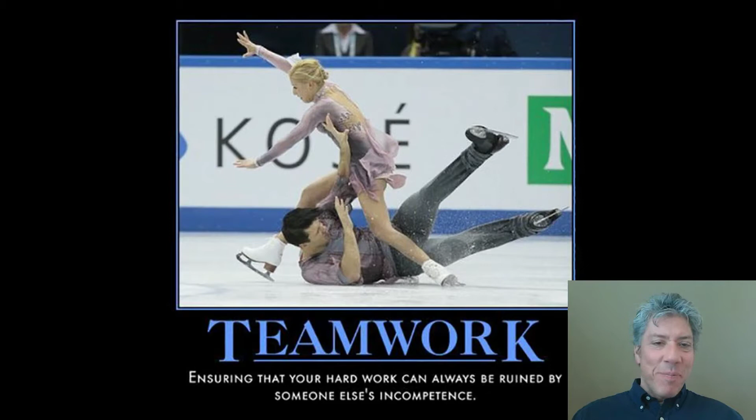We'll start our discussion with a demotivational poster about teamwork: ensuring that your hard work can always be ruined by someone else's incompetence. That one hits a little close to home sometimes, but it's funny.

So we're going to talk about shaft design. This is chapter 12, and to design a shaft there are several steps you have to take. The first thing is you have to know the rotational speed of the shaft. If you don't know that, you can't design the shaft, mainly because specifying the rotational speed helps you determine the life. There are tables in our book that tell us how long typical types of equipment and machines should be designed to last. A car should be designed to last, I think, 3,000 to 4,000 hours, something like that. Industrial machinery is about 20,000 hours.

You've probably not been out in the real world much, but I remember seeing a machine at Grody that had come back in from wherever they had sent it, maybe China, I don't recall, but it was a machine they had designed. I'm sure it has some shafts in it, but that's not the point of the story. Anyway, the machine came back, and if a machine can look tired, this thing looked tired and worn out. There was grease all over it, parts hanging at a weird angle, holes had been drilled and things added. I think the thing had something like 20 million cycles on it. Sometimes people get older and look tired, but this was a machine that looked tired. I've never seen such a thing.

But anyway, the rotational speed helps you figure out, if it's supposed to last so long and it's going to turn a certain speed, how many cycles is that? How long does this thing need to last? That comes into play when you're talking about the fatigue strength.

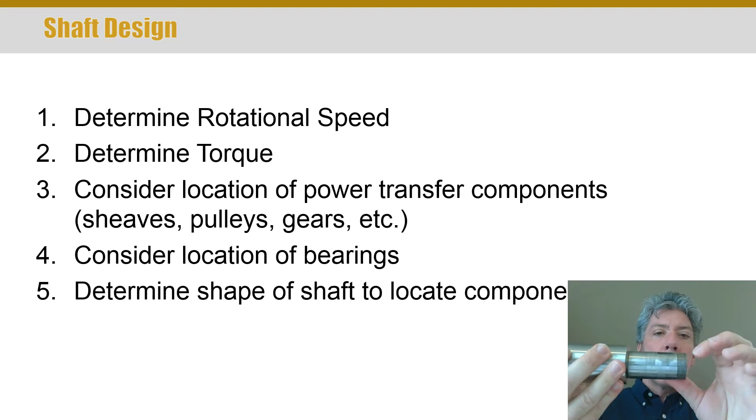You can see a Woodruff key here, and what's called a sled runner key here. You can see the end where it was held in the lathe as it was turned - there's a fairly rough surface here, about like the grooves in a vinyl record. This section's a lot smoother.

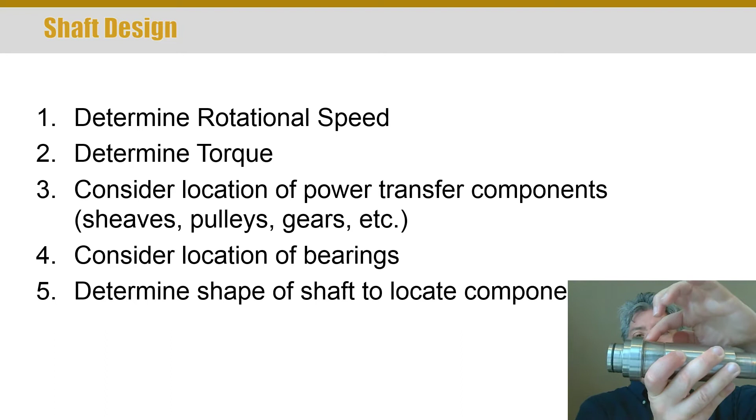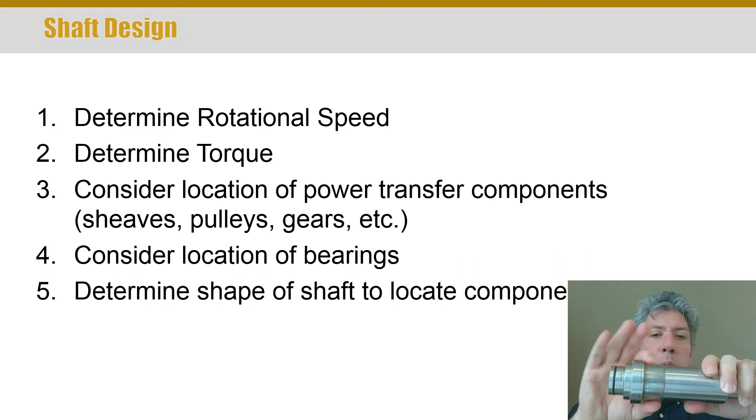This section's smoother, and there's another shoulder in the shaft there - it's busted off on the end, I'll show you that in a minute. It's also got a groove right here, and if you put calipers on this section, you'll find it's smaller than this section. The reason is if an element sits here, we want to slide it easily until we get here and then have a really nice fit. The finish here is smoother and the size is a little larger, just because we're trying to make it easy.

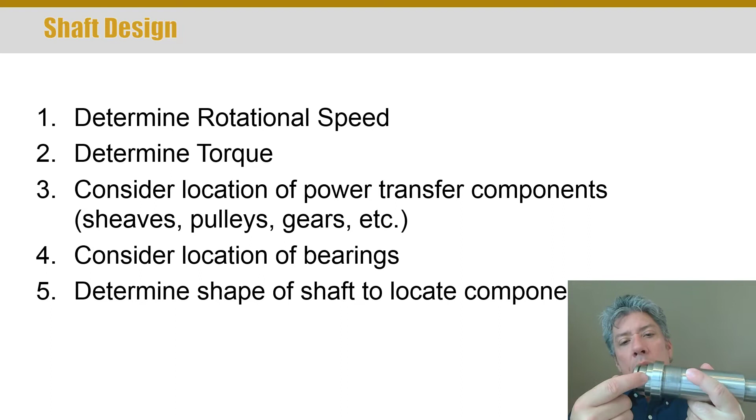Now this groove probably served - I don't know what this came off of. It was in the school when I started; I've held on to it because it's so useful. But at this point there's probably a place for a snap ring groove of some type so that whatever element goes here can't come off. You notice there's a pin drilled here, and there's an O-ring still in a groove here. So this is the kind of shaft we're talking about.

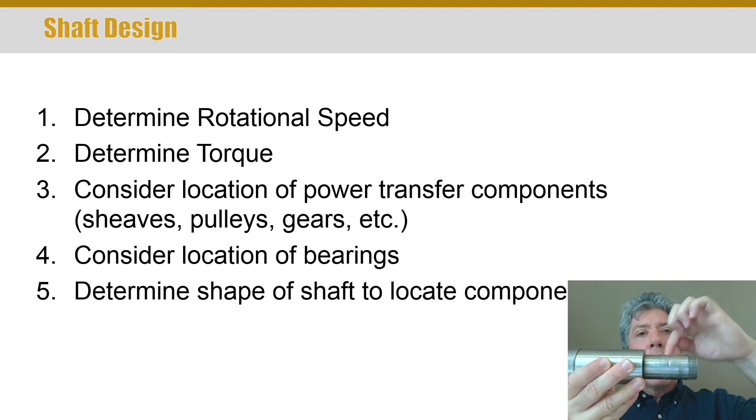You probably can't see it, but one of the tricks that's been used that I think is a bad idea—you want to try to avoid it—is in the shoulders. Right next to the shoulder, they've actually used the lathe and gone in, creating what's called an undercut. The reason it's undercut is because the diameter right here at the shoulder is actually less than the diameter on the bulk of the shaft.

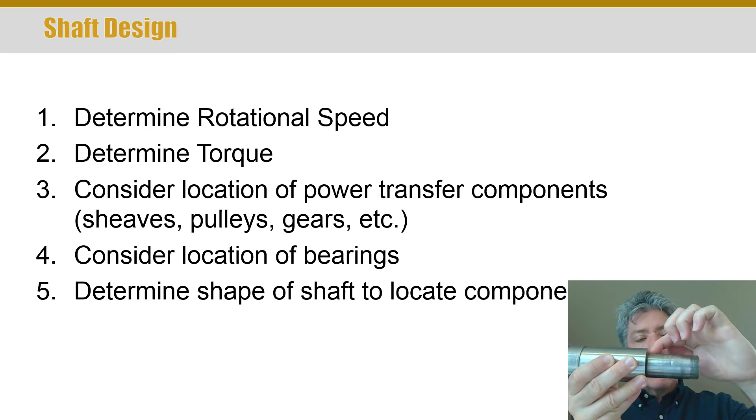Now, of course, this is already a point with stress concentration. Giving it less material, in my opinion, is a bad idea. There are ways to avoid that—maybe this designer couldn't, I don't know. But they similarly undercut near the shoulder here.

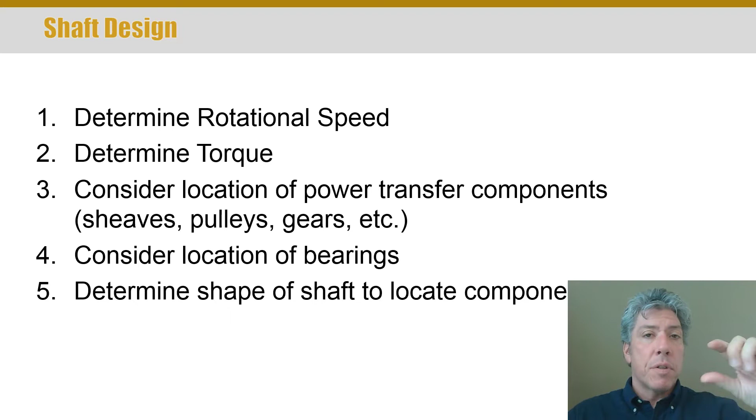Now, whatever this was used for, maybe it didn't really matter. Maybe the loads were so small and there were other reasons for making the shaft the size it is. It didn't matter—they could just undercut and make their lives easy. But most of the time, if you avoid that, you can have less material, in other words less diameter of the shaft. There are more steps.

Let's continue—calculate the torque, radial forces, and bearing reactions. Before, we said you need to know the torque—generally how much torque you're going to put into the shaft at one point. But torque can vary along the length of the shaft. If you think about several machine elements, like one main shaft that drives several pulleys, each pulley extracts some power, so the torque going to the next element will be reduced. We're talking about normal operation.

Obviously something can happen where a belt breaks and no power is flowing out of that particular section, so all the torque can go to the next pulley. These things are possible, but we're talking about normal operation when we design our shafts.

Now the radial forces and all of the bearing reactions are really important because those are our lateral or shear loads that cause moments in the shaft and can cause the shaft to fail. Those are the loads we have to design the shaft to carry.

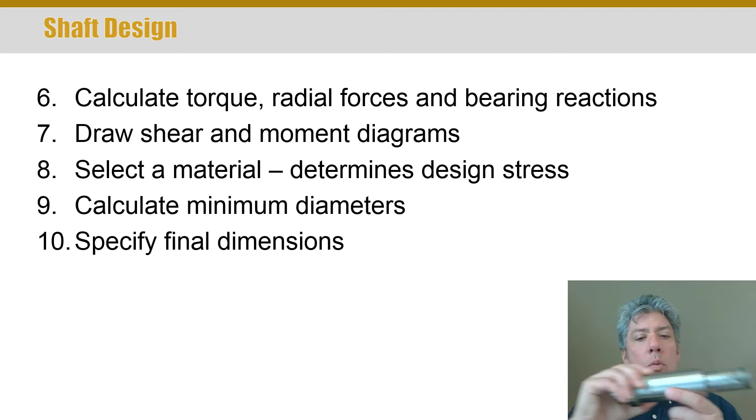So guess what—we get to draw shear and moment diagrams. If you remember strength of materials, you've probably drawn these. The thing is it's a little harder this time because in the shaft you're going to have both a horizontal plane to consider shear and moment in, but also a vertical plane, because all the loads—well, sometimes that doesn't happen. Sometimes the loads are all in one plane, and in that case you don't have to consider the horizontal plane.

But many times you have to consider both planes, so you end up with sort of a double beam—a beam in this direction and a beam in this direction. Now it's round, so the strength of the beam is the same in both orientations. But anyway, we end up making shear and moment diagrams, often in two planes rather than just a single one. What we really care about is the magnitude of the loads along the length of the shaft.

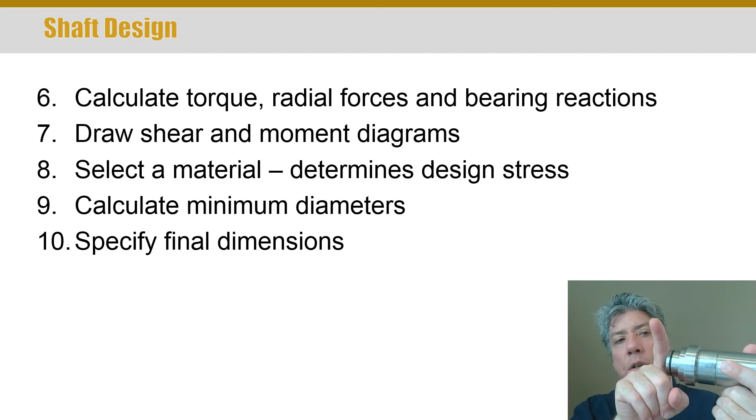So after you've got your vertical and horizontal planes, and you've calculated the reactions in those two planes and all the forces in those planes, as well as knowing the torque down the length of the shaft, you can draw your shear moment diagrams, locate points that have maximum moments, and take the square root of the sum of the squares. Basically, if I've got a moment in one direction and a moment in another direction at some point in the shaft, I have to take the vector sum—I don't care at what angle it ends up being, but I have to take the vector sum of those two moments to get the maximum magnitude of moment at that section of the shaft. You'll see more about this in the example problems I work for you.

Alright, step 8: select a material. This is the point where you've almost completely specified everything you need in order to calculate what the diameters have to be.

The way I help students understand this is: you might be able to make a shaft out of a material as soft as butter to do the job. The problem is it's going to be absolutely huge because butter has such low strength. But the stronger the material of the shaft, the lower diameters that will be required in general.

Now, that's not quite all. You also have to determine—are you going to have this machine used basically as it's cast? Will you do some machining on it? Is it machined out?

Exactly how is it made? Because that in part determines how long that material will last and resist fatigue - in other words, its endurance strength. So there are some other things to consider. But once we've gone all the way through step 8 legitimately, then step 9, we can calculate minimum diameters.

The minimum diameters we calculate, there's actually two equations we have to use. I'll show you those in a moment. And then finally specifying the final dimensions.

Now why wouldn't the numbers we calculate in step 9 be good enough? Well, we want to use preferred sizes. So if you calculate a required diameter based on strength and the load and so forth, how likely is it you're going to get 2.000 inches? It's not going to happen, right? You're going to get some odd 1.893 or something. We'll just round it up to a preferred size and you're good to go.

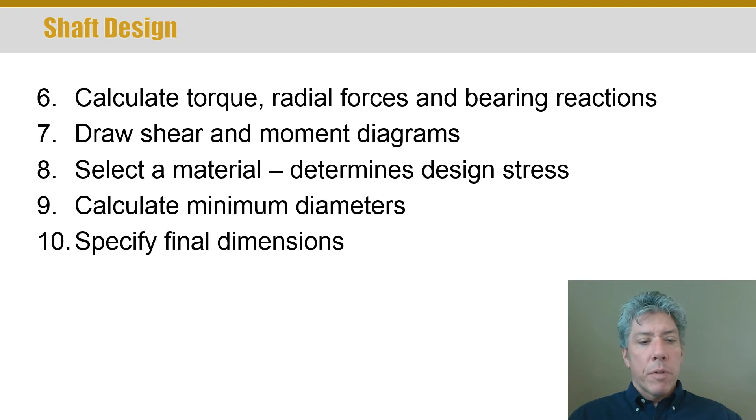So what factors affect shaft design? Let's consider that now. There's a lot of things to look out for. If you have a long cantilever - imagine this shaft, I'm guessing there may have been a bearing here, so this portion of the shaft would have been cantilevered out. And if this portion holds some type of machine element that has to transfer power, which it looks like it did because we've got two different keys here, whatever element was here twisting the shaft, well that was a section that was cantilevered. What we'll see later is anytime you have a gear, a belt, a pulley, anything like that, you end up applying bending forces to the shaft.

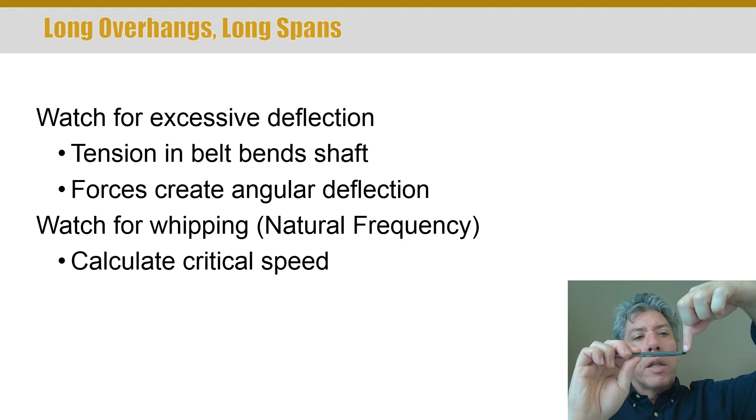A belt is a classic example - let's just imagine that we had a pulley out on the end of the shaft and we put a V-belt on it, tension it up real good and run it. I'm going to use a lighter illustration for that shaft since that thing's heavy. So pretend this is my shaft for a moment. Here's our load, our lateral load out on the end, and our last bearing is, say, here. What that will tend to do is bend the shaft.

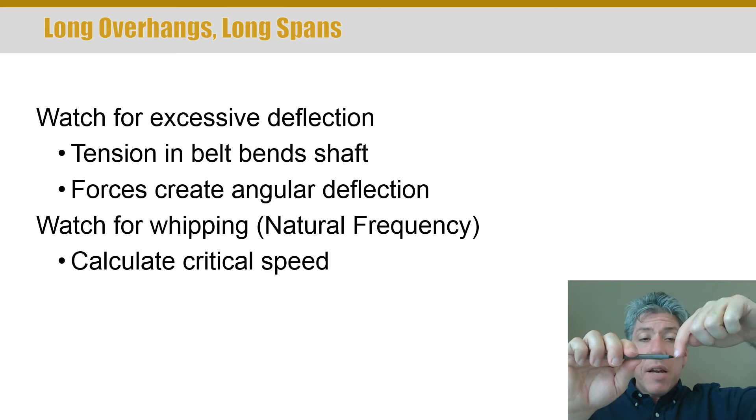Now, as the shaft rotates, the load stays in the same direction. So from the shaft's perspective, it's as if the load is rotating around, and essentially what's happening is we're doing this to it - hopefully you can see the pen deflect. And so that is a fatigue type load, something called fully reversed bending stress, because one particular element sees tension and then compression alternately, and of course it's varying in a sinusoidal shape.

Now, if there's too much tension in the belt, what can happen is the belt will fatigue the shaft and break the shaft. So you have to watch out for that and make sure the belt will not be over-tensioned and cause trouble. Another thing that can happen is something called whipping.

If the shaft is rotated at its natural frequency, or at its critical speed as it's also called, what can happen is that anything that's offset - if you imagine this shaft, you build it out of the best material you can, but is the center of mass going to be right dead on the center of rotation, or will all the elements be perfectly balanced where the center of gravity is exactly on the center of the shaft?

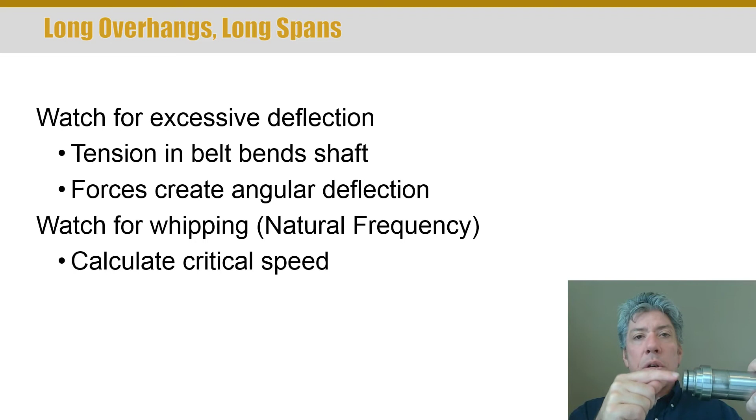No, of course not. So there's some distance from the rotation center to the center of mass. Now, as the shaft rotates around, that's like whipping a weight around, and what happens is that the shaft can hit its natural frequency, where every rotation causes the shaft to go farther and farther.

It has to do with the stiffness of the material, and the geometrical stiffness, which is due to the geometry, the size of it. But basically you need to calculate the critical speed. Now, it's not really easy to calculate it. A better thing to do is to measure the critical speed, essentially the vibration frequency, which can be done by other techniques I won't describe here.

One is a fairly simple technique: you listen to it ring, basically. You excite it and listen to it ring. But all that aside, if you can calculate the critical speed, you should. And really the calculation is not all that useful, as much as it is useful to know what you do to change the critical speed.

One thing you can do, if you add mass to the rotating assembly, what will happen is the critical speed will drop. Now, that may sound like a bad idea, but think about it. If your target speed is, let's say, 1,000 RPM, and you've got a critical speed at 1,000 RPM, but you add more mass, that moves the critical speed, let's say, down to 800 RPM. Well, as long as you accelerate through that 800 RPM quickly, you're not at the critical speed anymore. You can get on the other side. You can leapfrog the critical speed.

Of course, one solution, rather than adding more mass, is to increase the stiffness of the shaft. So one way to do that is to increase the diameters. Now, that also adds mass to the shaft, but typically the diameter will, despite the mass you add, increase the strength much more than the mass added, and so it increases the stiffness much more. And so that typically will move the natural frequency up, and as long as you never get up to the natural frequency, then you don't have any concern for the shaft failing due to that phenomenon.

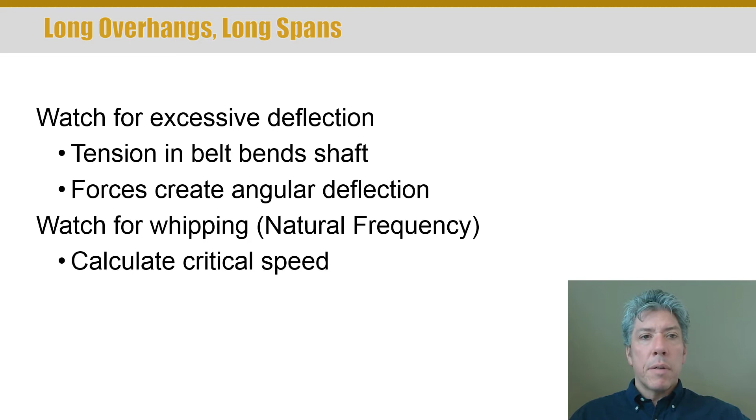Now, shafts commonly less than 3 inches are just made out of cold rolled steel. You can get what's called shafting, which is high precision shafting. There's several different grades. You can get it more or less precise. Typically, if you get a shaft that has very few features that need to be cut on it because it's close to the nominal size, typically what will happen is you'll just buy it about 1/1000th of an inch undersize. So if it's a 1 inch shaft, it's going to come in at 0.999, or maybe 2/1000ths undersized, 0.998. That's really common, and shafting is a special type.

If you use cold rolled steel, cold rolled can't be just applied directly as shafting. It's not perfect enough. It's not round enough. It really does have to be turned. But shafting that is already made, if you cut a key in it or you cut features in it, a lot of times you have to straighten it back out, because when the shaft is made and it's precise, what will happen is it has remaining residual stress in the surface material, and when you cut features in it, it deflects enough that it has to be straightened. And that's a whole art to itself.

You can imagine that many shafts aren't worth straightening, but shafts from things like large ships are commonly straightened in order to improve their performance and get the center of mass closer to the center of rotation, often is the goal. And of course reduce stress on bearings and things like that.

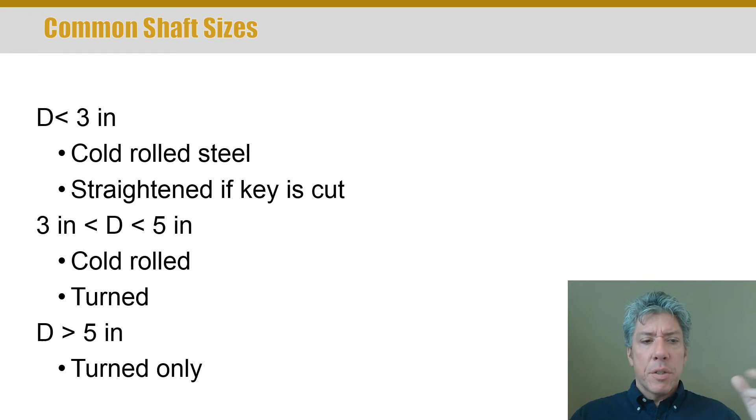Between 3 and 5 inches you can use cold rolled, you can use something that is just turned, but greater than 5 inches are typically only turned. In other words, put on a lathe and machined in order to create the shaft. So all large shafts for things like large ships, any cruise ship shaft, etc., is going to be turned. I mean, I suppose it could be forged, but you need features on it that are precise, so at least sections of it are going to be turned.

What materials do we make shafts out of? Well, we're going to approach this from the ductile material approach, and basically use what's called the maximum normal stress theory of failure. If you need a very complicated shaft, like a crankshaft that's going to be made out of cast material, then again you need something different than what we're showing here. This is just for shafts that look generally like this thing, okay? Things that are common machine shafts that are custom.

Most shafts are made of steel, which we will consider, and so they'll have similar elastic moduli. In other words, their material stiffness property will be pretty much the same regardless of what alloy you choose. You can choose some super strong alloy, and yet its stiffness won't be any different, it just is stronger. Or even a weak 1020 steel will still have about the same material stiffness.

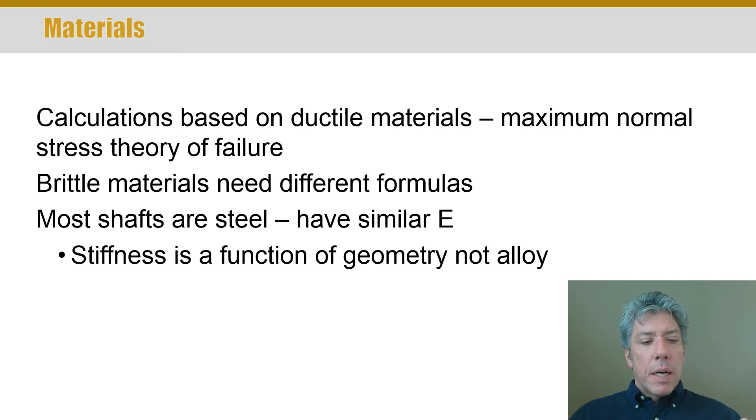It just can't take as much load as something that's stronger. So the stiffness of the shaft will be a function of geometry primarily, and not the alloy. It is true that each steel alloy has slightly different elastic moduli, but not enough difference to warrant changing material just to get stiffness. You really have to change the diameter to get stiffness out of the shaft.

So here's a typical shaft. You can see a gear mounted all the way on the left, there's a bearing at B, another gear at C, and finally another bearing at D. Now you notice gear A is cantilevered out off of the bearing B, and so that section of the shaft is going to experience potentially much higher bending loads, whereas the gear at C is straddle mounted, so the effective moment in it, in the middle of the shaft, will be lower.

Here's what I mean by you have to design it. You have to decide how far apart each of these elements will be, where they'll be located. Are you going to cantilever, or are you going to straddle mount everything? What kind of features are necessary in the shaft? Do you need shoulders? You see at least four shoulders, one shoulder for each element, so that that element can be located precisely.

Now, you notice there are no retaining ring grooves for the bearing, but there are for both gear A and gear C. Why is that? Well, commonly the bearings are held in place by a housing, so the housing has features that prevent them from moving. Now one problem: if you put a shoulder on the opposite side in the housing on one bearing and also on the other bearing, as the shaft heats up and the case has a sort of delay in heating up, the shaft can end up generating very high stresses.

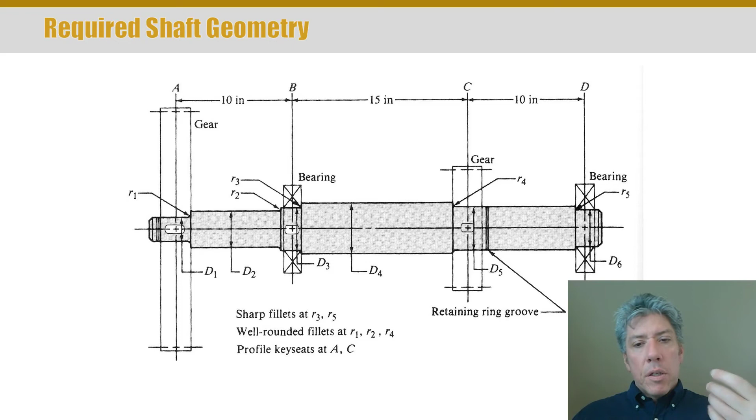It's convenient to have the shoulders to locate the gears. It's nice to be able to reduce the mass of the shaft by tapering it along the ends, because then machine elements can be put on and assembled easier. So there's many reasons to turn the shaft and have different diameters along its length. Don't be a lazy designer and just try to get one diameter and be done with it.

Now, the power in the shaft, the power that the shaft transmits, and the torque are closely related to one another. You'll see the power-torque-speed equation appear over and over. Technically from physics, power is simply torque times speed.

But it is convenient to have power in horsepower, torque in inch-pounds, and speed in revolutions per minute. If that's the case, you don't want to figure out the conversion factor every time, so you'll see me write this equation and use it over and over: power equals torque times speed divided by 63,025.

Some people just use 63,000. A more accurate conversion factor is 63,025. This allows us to put power in horsepower, torque in inch-pounds, and speed in RPM, with the units consistent by that conversion factor of roughly 63,000.

Now, sometimes you want to use torque in foot-pounds, for example. Page 695 has a whole nice table of conversion factors in both metric and English units. I highly recommend you bookmark that page now, because you'll see the conversion factor of 63,025, but also the conversion factor of about 5,000 some odd when you want torque in foot-pounds instead.

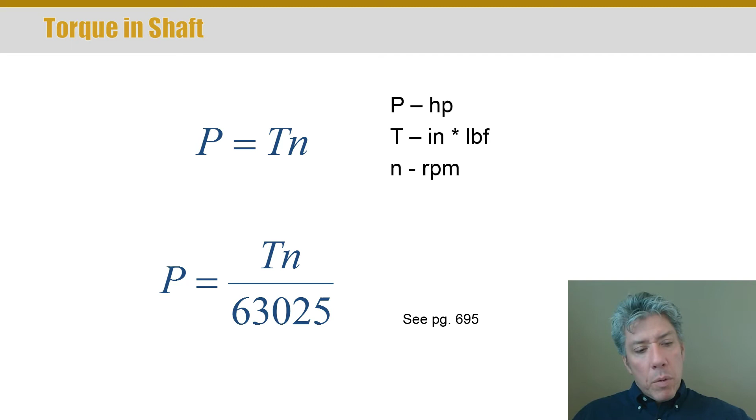This is an equation worth memorizing. If you don't want to memorize it, that's fine. By the end of the class, you probably will have it memorized, though.

So what are the effects of the machine elements on the shaft? Well, gears end up, it turns out, because of the involute profile, which we'll learn about later, pushing each other out of mesh. There's a radial force generated because of the shape of the tooth that pushes them apart.

Also, the whole purpose of the gear is to transmit torque, so there's essentially force trying to turn the gear teeth. That force is a tangential load—it's the whole point of having the gear in the first place.

Now, obviously, the tangential load, W sub t, is related to the torque, but it turns out that because of the shape of the teeth, the radial load is also related to the tangential load. So there are equal and opposite loads on the gears.

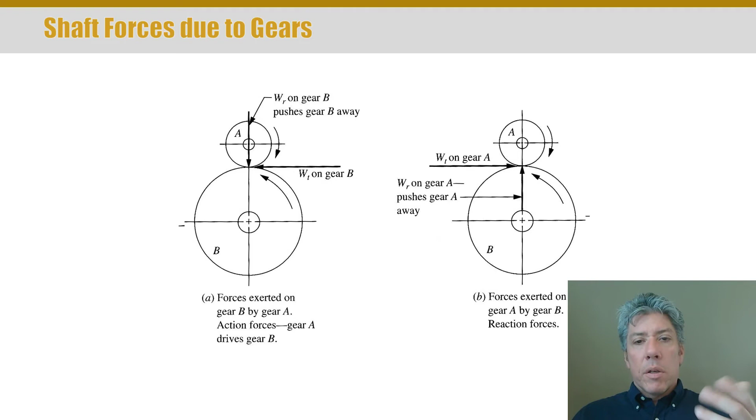For example, if there's a radial load and tangential load on gear B, the larger gear, then there are equal and opposite loads on gear A. Depending on which shaft we're designing—the one A rides on or the one B rides on—we need the loads in the correct direction, so you really have to think about the proper direction for all of these loads.

The pressure angle is given the symbol phi, and the tangential load and radial load are related to one another by that pressure angle. In fact, the radial load is the tangential load times the tangent of that angle.

Commonly it's going to be 20 degrees because gears come in standard pressure angles—well, you could make anything you want, but standard ones are 20 degrees. 14.5 degrees is an obsolete standard. There's 20 and 25, I believe, that are standard for spur gear teeth, and other angles for some other gearing.

And of course, D is the pitch diameter, not the diameter of the shaft, but the diameter of the machine element, the gear in this case.

Notice that the radial load is written in terms of the tangential load. The reason is because the tangential load is really the whole point in having the gear. That's what causes the gear to turn and transmit torque. The normal load is just included for completeness—we typically won't even care about it, at least not right now, not till we get to gears.

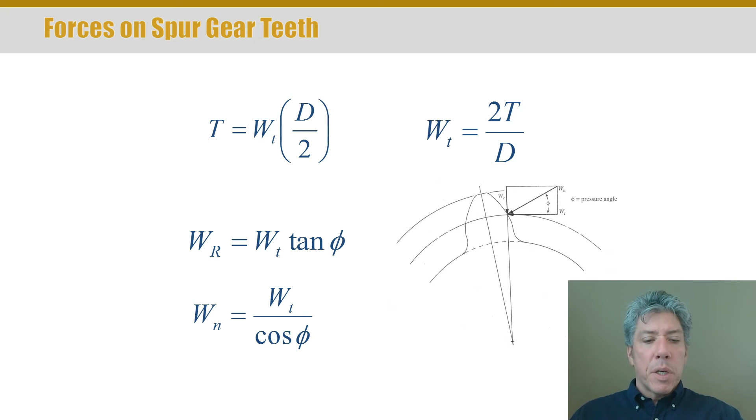It's something you typically calculate from torque, obviously. You know how much torque, and because you know how much power has to be transmitted, you end up backing out the tangential load first.

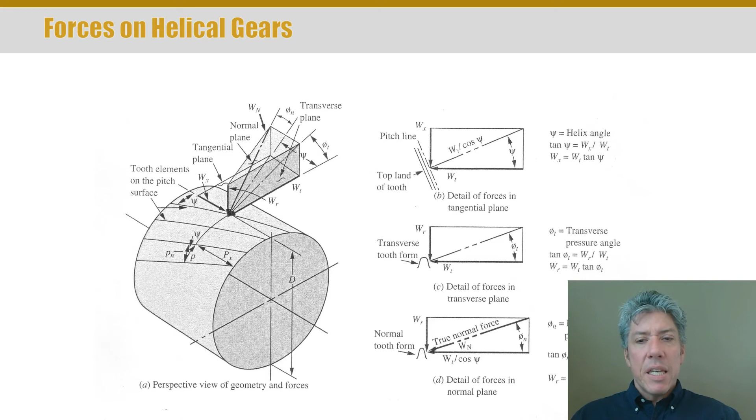Now in helical gearing there is a difference between the transverse pressure angle and the normal pressure angle, but don't worry, I'll make it clear which one I'm giving you, and I'll make sure it's easy for you to deal with if I ever give you helical gear teeth.

So I've already talked through all of this. Again, W sub n is the true normal force—it's the force that's actually applied to the gear teeth. Gear teeth are always lubricated; you should always put oil between them, at least for decent design.

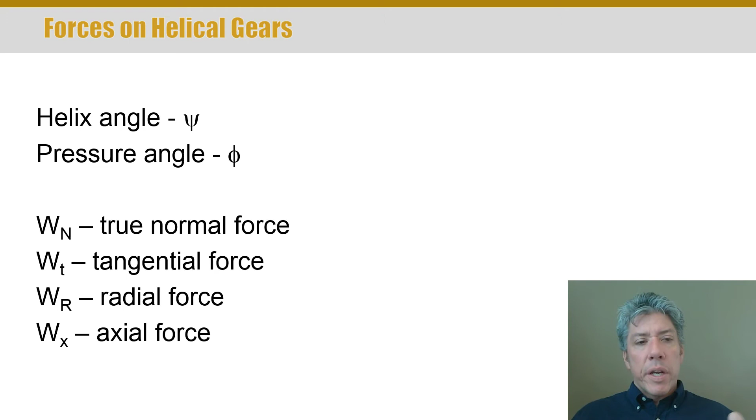I'm sure there are some machines that don't have it, and some gear materials are self-lubricating, some plastics, etc. But the point is that they can slip—they do slide on one another. So the oil basically makes the force along the tangent of the surface zero no matter what direction you're looking at. So the only load that can really exist is the true normal force, but that normal force breaks down into the tangential, radial, and axial components as you saw on the previous slide.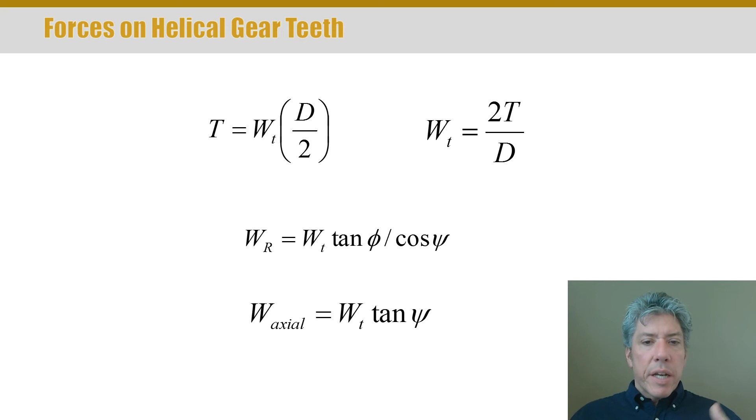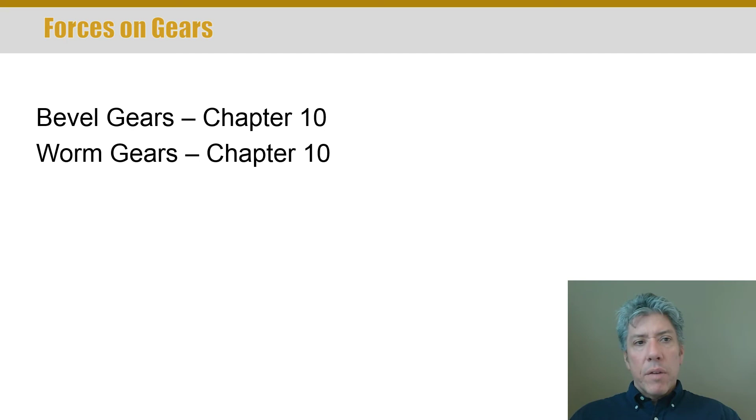There are some more complications that come from bevel gears and worm gears. We'll look at those in Chapter 10. For now, I just won't give you this type of gearing when you're trying to design a shaft, so don't worry about it right now.

What about chains? We haven't learned much about chains yet, but for chains there's always a tight side and a slack side. Think of your bicycle—when you pedal, it's the upper chain that's in tension, pulling the rear sprocket on your rear wheel. The lower side is slack.

That's the whole reason that on a multi-speed bike you have to have what's called a derailleur. It's basically a spring-loaded set of sprockets that take up the extra slack in the chain. They're slack because you have to accommodate all the different gear ratios—you need a longer or shorter chain depending on the sprocket ratio.

So typically we neglect any force on the slack side. You typically don't want to install a chain where there's preload. You want some kind of tensioner, but not one that gives significant force on the slack side most of the time. So we'll neglect that, and the force in the chain can be calculated.

You see the equation there based on the diameter of the sprocket and the torque. It's a simple equation—basically a moment equation, force times radius equals torque. But we'll neglect any force in the slack side of the chain, whichever that happens to be.

And we're going to neglect something else. Since usually the angle of the force Fc, the force in the chain, is close to the direction between the centerlines of the sprockets, we'll typically neglect that little angle phi. We'll just say the force acting on the chain acts directly between the centers of the sprockets.

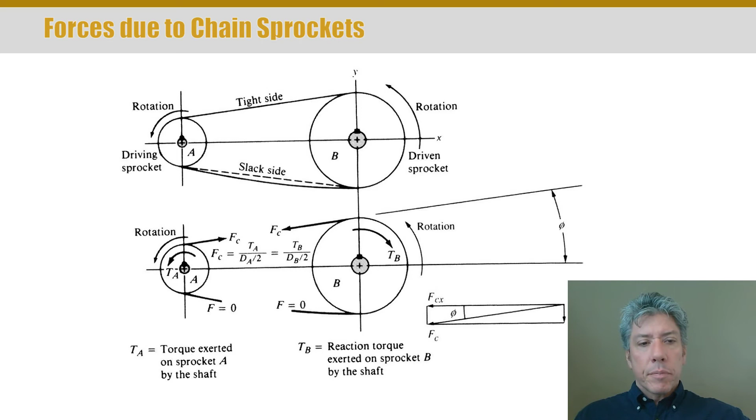Now belts, on the other hand, cause force on shafts as well. As a matter of fact, in a belt—say a V-belt—you have to tension it where there is pre-tension in the belt. So both sides, the tight side and slack side, have significant force in them, and we'll call that F1 and F2. Of course, the force in the tight side is larger because that's technically the driving side.

What we're going to do is basically assume that the bending force on the shaft is just the sum of those two forces, F1 and F2.

Now the magnitude of F1 and F2, and the relationship between the two, depends on how tight the preload is made. Whenever you put a belt on, you have to give it some initial tension before operation. During operation, one side becomes even tighter and the other becomes even looser—thus the name tight side and slack side. If you don't give enough pre-tension, the slack side can whip around a lot, and that's very problematic.

Depending on what the pre-tension is, that will change the relationship between F1 and F2, and it'll increase the total bending force. The tighter the initial tension in the belt is, the more bending force there's going to be on the shaft.

So how do you accommodate that so you can do calculations if there's a pulley on the shaft? We assume the belt is properly tensioned, and reasonable proper tensioning is where the tight side has about 5 times the force of the slack side. That's a rule of thumb—it's good tensioning for good service life of the belt and good operation.

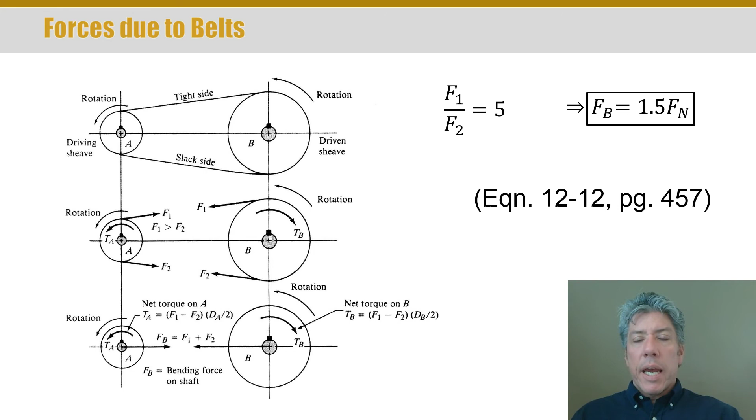Now, it's not obvious, but if you take that relationship between F1 and F2, you can come up with the total force in the belt. Here's the equation you need—it's equation 12-12, on page 457. I'd suggest you go look at the details of how it's derived. You'll see me use it in example problems. This is a page that deserves a tab, and equation 12-12 certainly deserves a highlight.

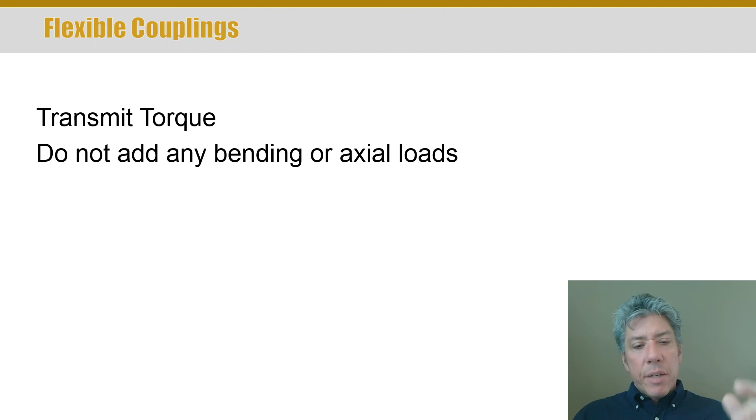Now, couplings are things that couple shafts together, typically axially. These typically do not have any side loading, so they transmit torque only and don't add any bending or axial loads to a shaft.

Now, since keys are features with relatively small sizes that introduce stress concentration, we need stress concentration factors. There's a lot more to this than what you'll see here, because the inside corner of the key seat can be cut with many different potential radii—you don't have a zero radius in those corners. Depending on how close the key has to fit, and how the corners are broken or not, the stress concentration the key provides will depend on that inside radius to a large extent.

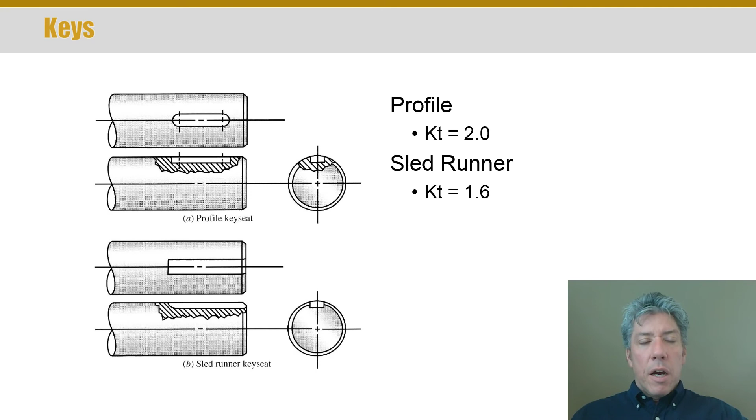We're going to simplify all that since it's not our focus in this class. We'll assume that all profile key seats, shown at the top, have a stress concentration factor of 2, and all sled runner key seats have a stress concentration factor of 1.6. These are reasonable starting points, but anytime you're designing a shaft, you should look up a table giving the stress concentration factor as a function of that inside corner radius, because it does make a difference.

It's the same story for shoulders in shafts. Shoulders can either be sharp or well-rounded. Again, there's a lot more to this, and if you've gone through Strength of Materials with me, you know we had a whole appendix devoted to calculating stress concentration factors based on the radius, the smaller and larger diameter, and so forth. That's not our focus in this class.

So for sharp corners, we're going to take the stress concentration factor to be 2.5, and for well-rounded corners, we're going to take it to be 1.5. So while there's a lot more to this, we're just going to take a sharp shoulder to be something we're going to shove a machine element up against.

A well-rounded shoulder is something where we just want to transition in size. So the picture here shows a mating element coming up against the shoulder with a well-rounded shoulder, but most of the time we're just going to assume that well-rounded shoulders are not those shoulders where we're going to mate a machine element against.

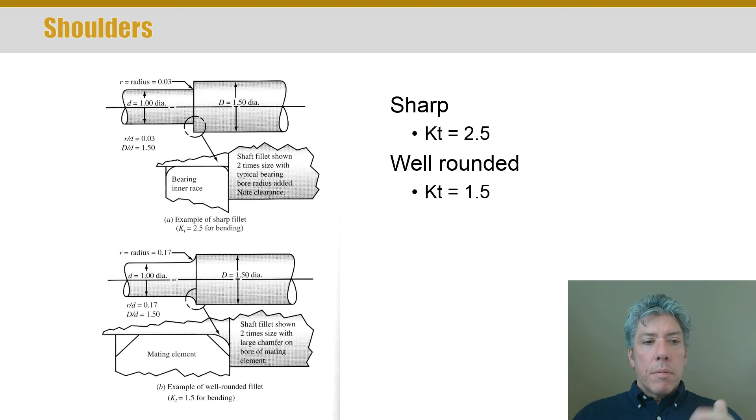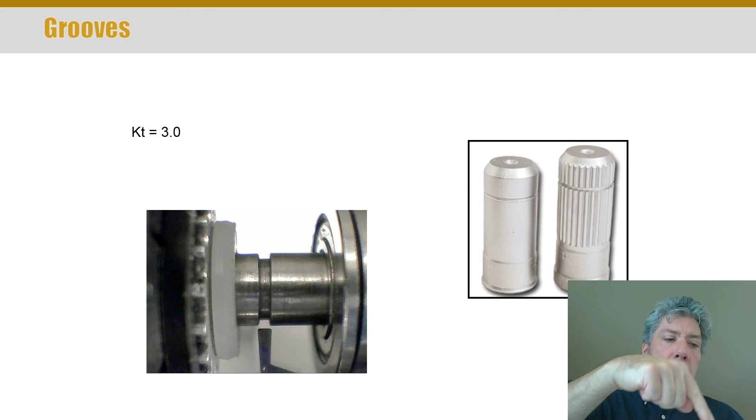The stress concentration factors are a field of their own, and you can look them up in references. But you'll notice that we've got a snap ring groove here, and an oil ring groove here. Any groove like that in the shaft typically will have a fairly sharp corner on the inside, and so in those grooves, we're going to take the stress concentration factor to be about 3 or so.

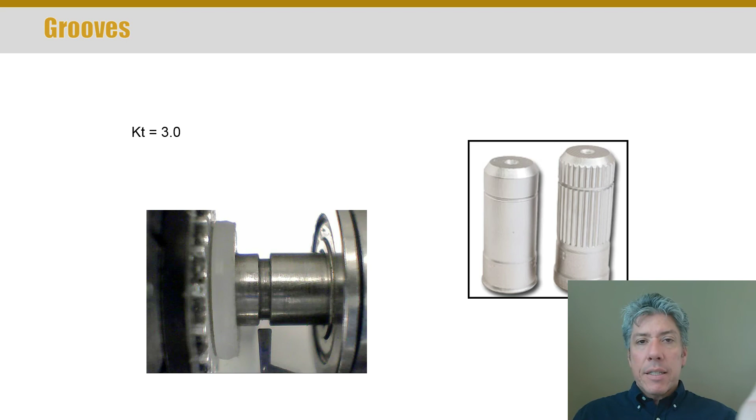And these are fairly common. Anytime you have a shaft that is splined, or even regular shafts, these elements are typically used for sealing with an O-ring, or for snap rings to axially prevent motion of machine elements on the shaft. Alright, so we finally come to our first equation for sizing sections of the shaft.

Now this equation is the less important equation. It is the shear force equation. It only considers shear loading, so think of all the radial loads in the shaft and not the moment at all. This equation involves calculating a required diameter based on the shear load in a section of the shaft.

Now where this equation is really important is more out towards the edges of the shaft where there's no significant moment. That's where this equation dominates. I'll show you another equation in just a minute that dominates the more central sections of the shaft.

So this doesn't include anything about torque, doesn't include anything about bending loads, and really the two equations I have are not equations that accommodate all three things. I'm not going to give you an equation that accommodates shear loading, moment loading, and torque loading. The problem with that kind of equation is it becomes very complicated very quickly.

Most of the time you can separate out shaft design into designs that involve essentially a shear load at the ends and moment and torque in the middle, and neglect the rest of it. And it's good enough, especially once you add a little bit of material to go to preferred sizes. You're usually well within an acceptable range of operation.

So here we're looking at those places where there are only significant shear loads. You'll notice in the equation we've got a V for shear, and that V is what you would get from your shear diagram. N is a design factor of safety, so that's something that bumps up the size of the shaft required based on whatever you want. KT is a stress concentration factor, 2.94. That has to do with the geometry. Don't worry about it, it's just something you need to use.

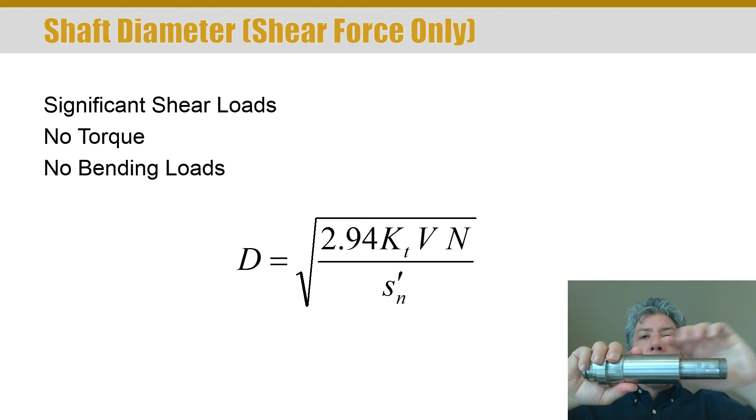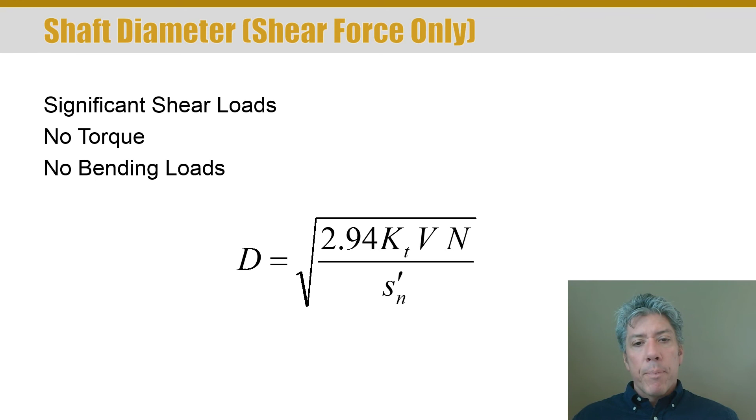So you're really comparing the shear load, V, to the modified endurance strength, SN prime. And the reason you compare the shear load, which is a radial load, to the endurance strength is because the shaft's going to rotate, isn't it? So from the shaft's perspective, the shear load is rotating around, and so now we're talking fatigue. So we want to compare the load, V, to the fatigue strength, SN prime. That's why we perform that comparison or take that ratio.

Now the bigger equation, the more important equation I would argue, is the one that involves moment and torque together. So you see we're taking sort of a vector sum of 2 loads, M for moment and T for torque. There's more to it than that, but stay with me. Essentially we're taking the square root of the sum of the squares, adding together the effect of the moment and the effect of the torque, which both are vectors, so legitimately cause a stress that would be a vectorial addition.

Now notice that the torque is not as damaging, so we take 3/4, and again this comes from geometry, don't worry about it, it's strength of materials stuff. But you'll notice that the torque is being compared to the yield strength, SY. Whereas the moment, M, it's got a stress concentration factor there, but it's being compared to the modified endurance strength.

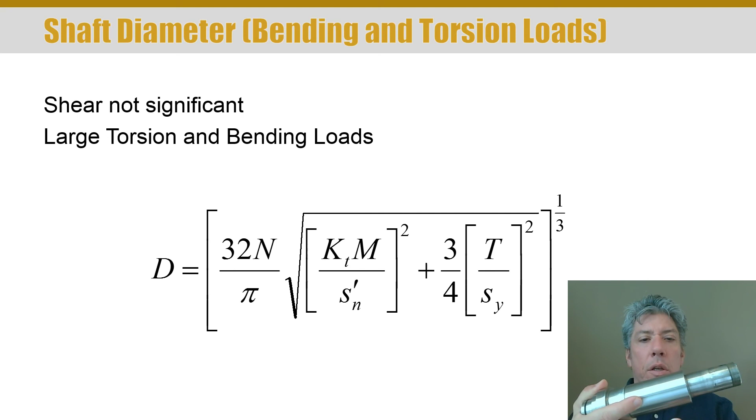Now why the difference? Is this a misprint? No, it's not. The reason is because the torque in the shaft, most of the machines you're designing with this kind of shafting will have essentially constant torque. You're constantly transmitting power, and yeah, there's some variation in it, but it's not all that large. It's not like a moment or a shear where the vector is rotating around the shaft. So the torque is essentially a constant. We're going to neglect any fatigue type torque loading, and so we should only compare it to the yield strength of the material, because we don't want the torque to cause yielding in the shaft.

But the moment, again, is a fully reversed bending moment, regardless of how you design the shaft. Well, I guess if you have a dead shaft that's not the case, but that's not the usual case. We're talking about mainly rotating shafts in this chapter. So we have to compare it to the modified endurance strength.

Now, N is a factor of safety, 32 over pi and the 1/3 power. This is all geometry and rearranging the required size from the strength of the material. And here's where we're neglecting shear, because this is the equation that usually will apply more towards the center of the shaft, and the other equation, the shear equation, applies more towards the ends.

But when you size the shaft, one thing that's really important, you need to calculate a minimum diameter from both equations along the entire length of the shaft. So it's very handy to put this into Excel, because you really don't want to apply this equation 10, 20 times along the length of the shaft by hand. You want to set up your moments, torques, and shears from your shear diagram in Excel, so that you can just drag down and calculate required diameters along the entire length of the shaft. You'll see me do that in the example problems.

I also made a SolidWorks model to hopefully help you understand this concept of a horizontal and vertical shear and moment plane, and how you have to add those loads vectorially. So we end up using these equations over and over again. You can't just say, okay, I'm going to design a shaft, I'll use this equation once. It doesn't work that way. You apply this equation multiple times along the entire length of the shaft.